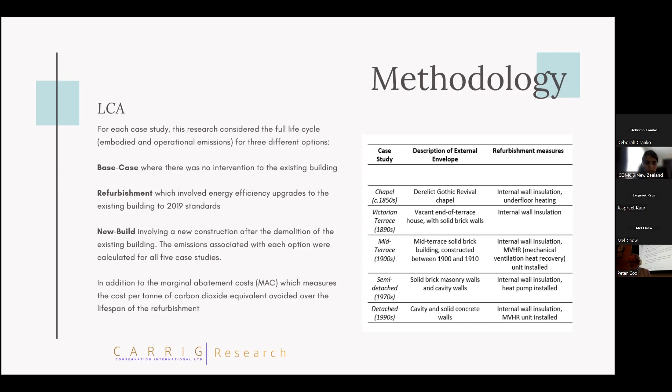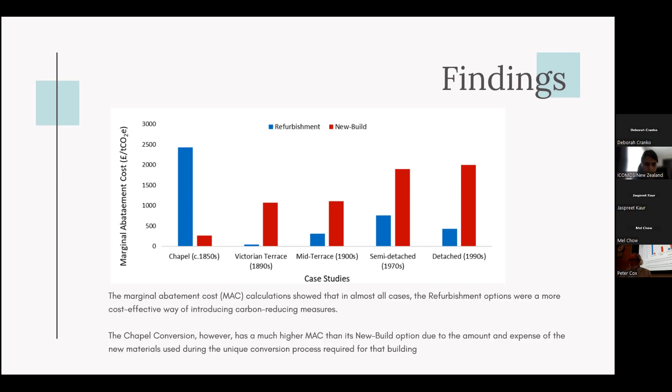What we measured was the reductions of that. We also looked at not only the carbon, but also the marginal abatement costs. This is a system used in the UK particularly, which looks at cost per ton of carbon dioxide. What we found is that doing the adaptive reuse and upgrade is far more carbon effective and cost effective than replacing any of the buildings we talked about.

And the worst case scenario - unfortunately this slide didn't work for me, but I had a little red circle. But if you can see my cursor, can you? Oh, can you see that cursor?

No. Well, basically the dark blue line is do nothing, and that means the carbon is increasing because of operational carbon and the leaky building. The dotted line is where you demolish it and build new, and you'll see there's a big increase in the initial carbon, and then it continues to go up. If you do the renovation refurb, then that's a gradual increase or decrease of carbon. It takes 63 years to pay back the carbon to replace a simple building with a new one. And that's really what we need to get across to people.

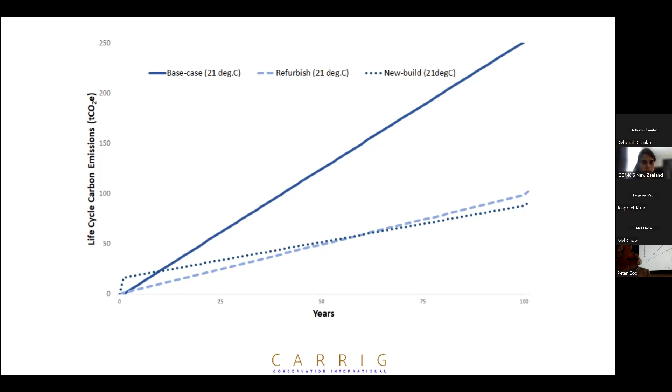Deep energy efficient refurbishment of historic buildings is necessary if we are going to achieve performances similar to new buildings. I also have a lot of argument for why building new buildings with carbon intensive products is not good for the environment. I know there's a housing shortage, but as I said earlier, we're beginning to see a lot of commercial buildings being vacant because there aren't that many people working in them anymore, working from home instead. So this could become a solution to both our housing shortage and reducing our carbon and particularly our emissions.

The quantity and type of materials matter, whether you put them into a building or take them out of a building. The simple use of an LCA tool can help, particularly at concept design stage, because that's the important bit.

And then there's EPDs, environmental product declarations. France is the first country in Europe to introduce legislation that all companies manufacturing anything have to have an independently certified EPD. That is going to become law throughout the rest of Europe probably next year.

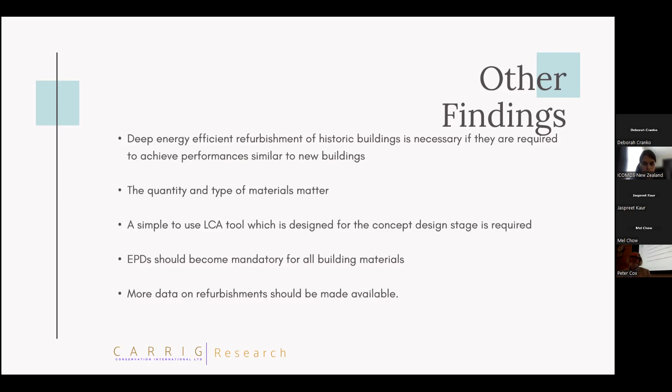So an LCA tool really should be easy to use, applicable to historic buildings, useful for concept design stage. And the planning process should allow for LCA so that the most sustainable decisions are made.

We did find a couple of years ago, because we came up with a good solution to a building and the owner went for planning, the planning officer didn't understand what we were doing and refused planning first of all. We had to go back to them and explain how and what we were doing, and what we were doing was right for the building. So we need more education to planning systems, but also better informed planners, if you like.

So we're hoping to come up with this kind of product, which will be a sustainable tool, suitable guidelines on sustainable historic refurbishment. That's already in train, and will be published in about August, certainly in Ireland, and it'll be available. All materials used in the building and construction sector in Ireland must have EPDs, and we expect that to be law by next June '24.

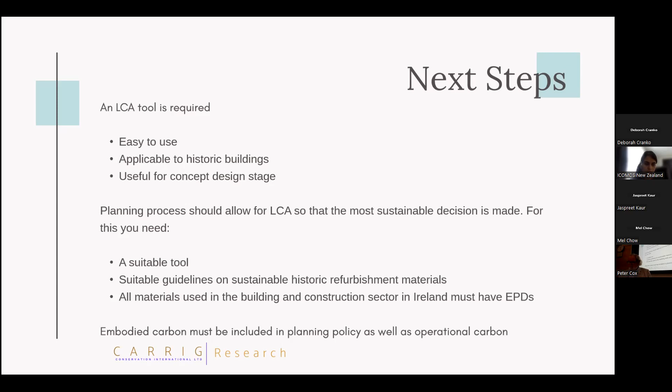So the circular economy is certainly a good move, and there is more buy-in, certainly in Europe, on this, designed for reuse and recognizing the value of waste. Tax incentives must be introduced to encourage material reuse, and local authorities could provide the skills to facilitate sustainable decisions.

This is the full document that we produced. It's on the Historic England website, and it's also on our website. They call it Heritage Counts, and they do a publication every year of different studies. This is a really good one.

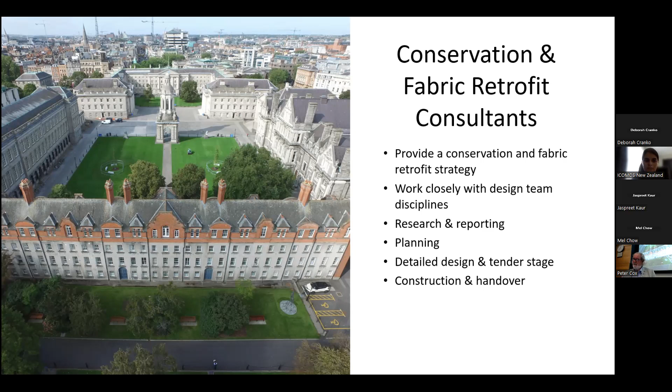So as I say, the back was originally harled, then cement pebble dash added in the 20th century. The cut-stone jambs and lintels were replaced for some reason, we don't know why. There were some new cast-in-situ window heads, which we left, as they were perfectly in good order. And then there was a lot of undulating stonework, because this was a stone main fabric.

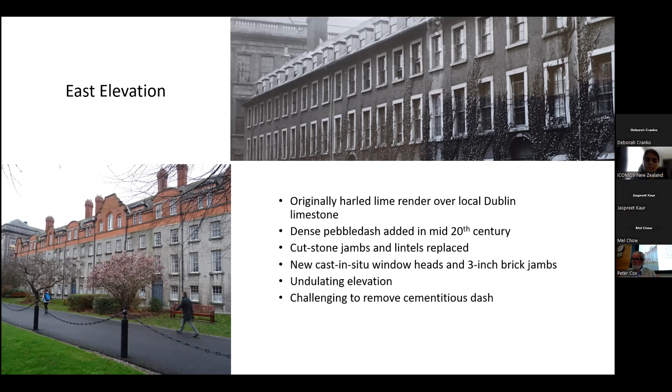So we removed the cementitious dash, and here you can see the rubble stone.

And then we started putting on the Diathonite, which is a lime-based render that has cork in it and is called an insulating render. In research we've done, mainly in Germany, we put this on a 1720s building and measured its performance over the last 5 years. A simple 40mm thick render with cork incorporated increases its insulation, decreasing the U-value of that wall by 35%, which is quite phenomenal. There are a number of products like that; we found the Italian one, Diathonite, to be the best performing.

But because it was originally harled, we did a lot of testing on doing a final lime dash on top of the render so you got the visual aesthetic of what it would have looked like. We did advanced weathering tests on that, and then evaluated what sand would have been used, the size, fines, etc.

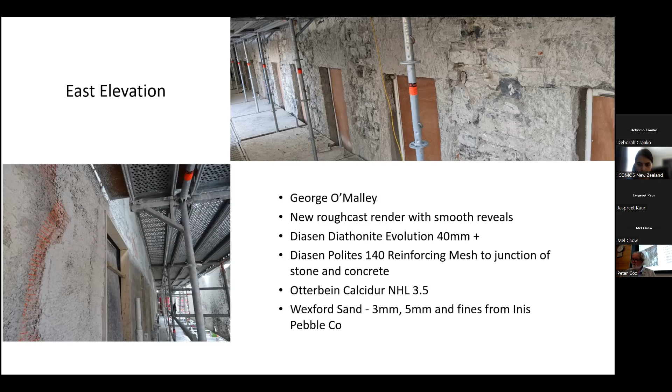Because we do all this materials analysis prior to writing specs, we can be very specific in writing them. We hired some of the best subcontractors, and again the college allowed us to do that, even though it was a public procurement project, which often means you have to take the lowest price, and that's usually bad.

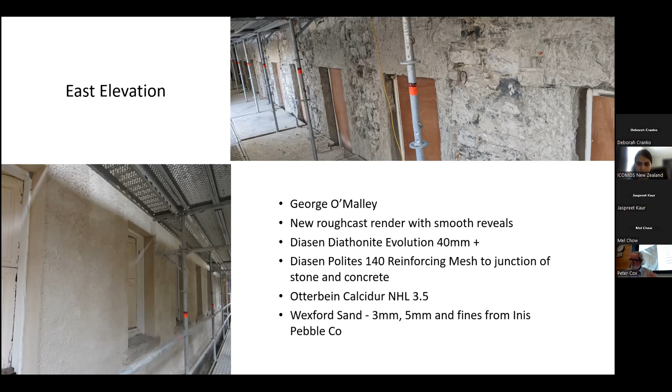So here it is on the bottom left at its final coat prior to the harling. It's worked tremendously, and we've been measuring the performance over the period of construction, and it's just phenomenal.

From an internal point of view, we like to do a lot of evaluating before we decide what we're doing, because if you're taking calculative evaluations on how things are going to perform, or how to do interventions, you don't have the actual information to make the decisions that you want.

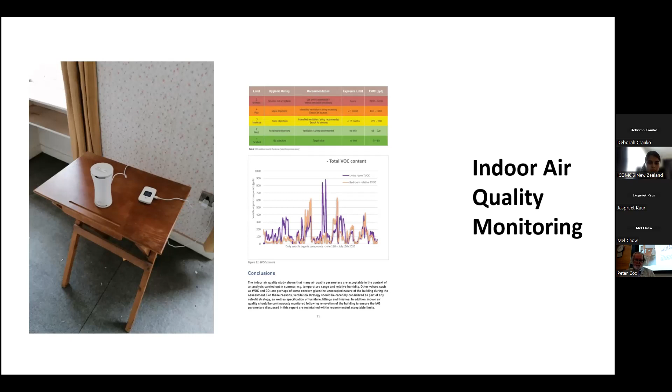So we carry out indoor air quality monitoring over maybe a couple of weeks, where we put these widgets in the existing rooms and measure the current indoor air quality. We've also been commissioned to do a post-occupancy series of tests as well.

We have invested in equipment to do in-situ U-value tests, where we put a widget on the outside and on the inside, and we can measure the heat flux and heat loss on the wall sections, but also on the window sections. And therefore, we know that we have accurate information.

We have a system in Ireland since the introduction of energy performance in buildings called BER, Building Energy Rating. If you want to rent a house, rent a flat, sell an industrial building, or sell an office block, you must have a BER cert. This is a tick-box system that was designed for post-1970 buildings. If you have a building that has a solid single-panel external envelope, it gives an automatic default of 2.2 U-value. I don't know what the conversion is towards, so apologies for that.

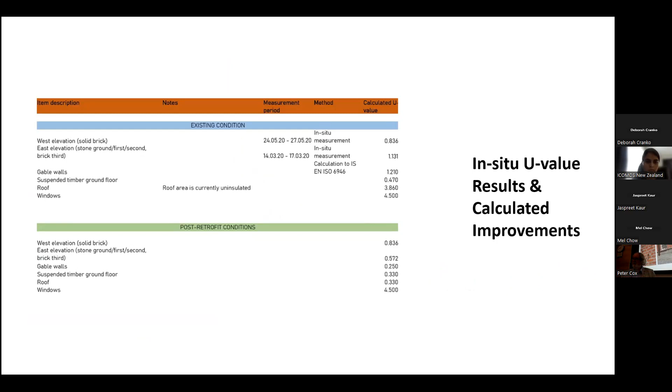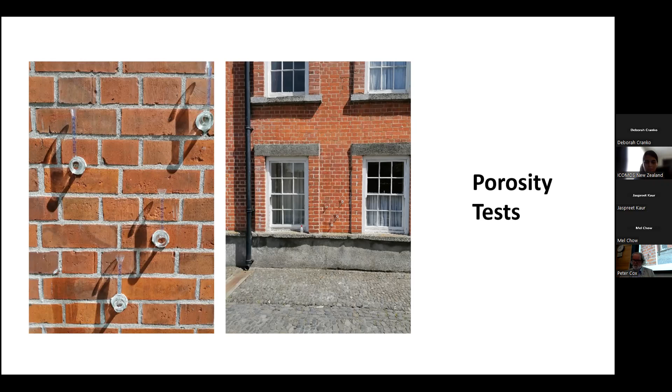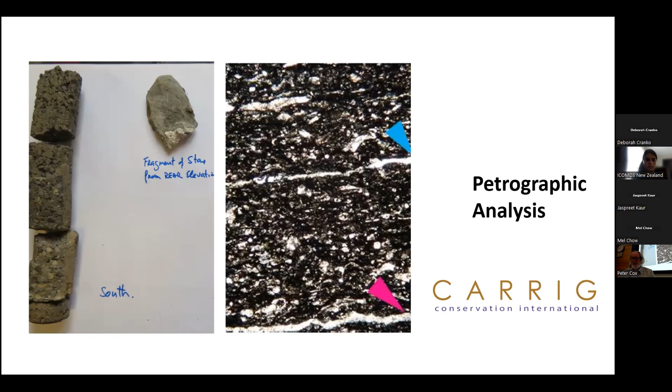Because we're affiliated with Trinity College, we have access to all the geology labs, and we took a core sample of the stone and did a full petrographic analysis that gave us not only the components, but also the porosity, the strength, and everything. So we do go into this in detail, but at the end of the day, it makes the building cost secure, because we knew what we were specifying, that it would perform, and therefore it was costed right.

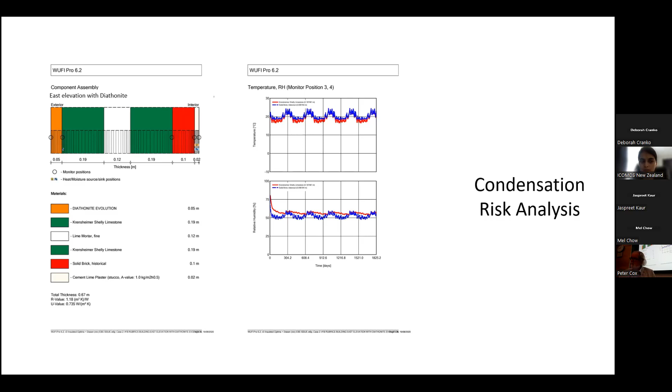In fact, this building did not run a penny over budget, which is pretty amazing. But it's all down to really analyzing the materials of the building first. We do condensation risk analysis, because that's one of the biggest problems in older buildings, particularly if you're using newer materials like closed insulation systems that will cause problems with moisture. We do a full thermal bridge analysis to see where the leaky points are, and we can then address those.

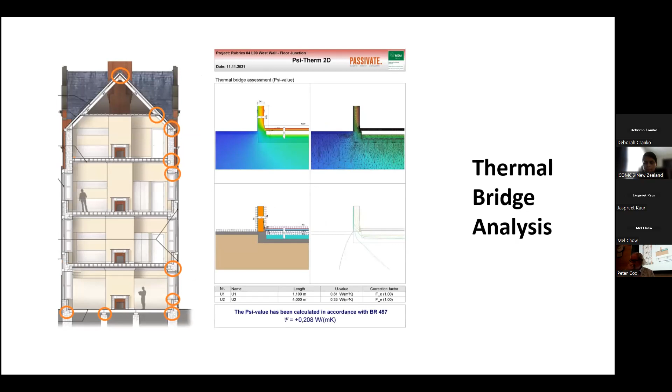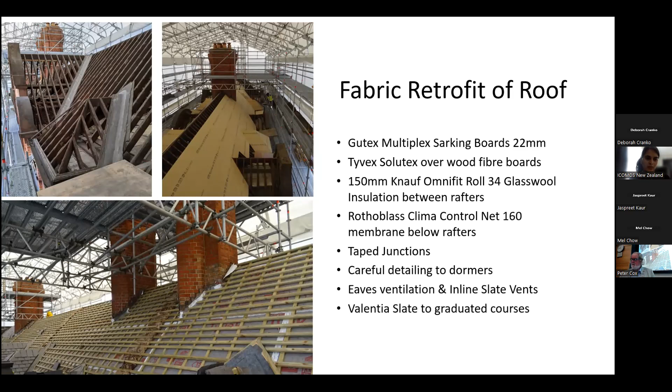So this is some of the work in Trim. The slate on the roof was original English slate, which wouldn't have been original to the 1690s building, but was actually replaced in 1895 or thereabouts. It was so bad you could stick your finger through the slate. So we replaced all the slate, but took that opportunity to really do a fantastic insulation job on the roof, which has performed tremendously well. We then reslated it with Irish slate, which reduced the carbon footprint of bringing material from England.

And this is some of the other photographs. The roof was extended in 1894, and that's why the steel is there. We decided to leave it, not to change it. So we used all that information to get there.

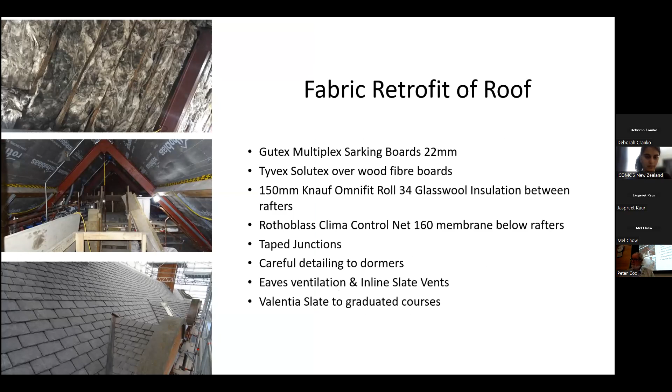There were suspended timber floors on the ground floor, with quite a void. We were able to put in geocell, a recycled glass insulation, on the ground and leave a gap which allowed air movement. This is performing really well.

At the moment, we're producing about 75% of the energy of that building through geothermal, with 21 boreholes that we put in the grounds. Then it's landscaped over again, so there's no visible destruction to the green area.

Already, even though it hasn't been released or publicly opened, enough people have discovered it, and they are trying to throw awards at it, which of course we'll accept. So I'll be going back to a flurry of activity on this building.

Just to finish off with a couple of adaptive reuse examples. This is a church, dating from about 1720. It was deconsecrated in the 1960s due to a fallen congregation, and the congregation moved to a neighboring church.

In 1986, some kids broke into it and set fire to it. As you can see, the roof and the chancel were gone. This is the poor architect, Derek Tynan, looking down and saying, 'Jesus, what have I done? How do I fix this?' Anyway, we did, and that's what it looks like today.

If you note, we found a full vault underneath the church with many burials in it, which we couldn't disturb, and also couldn't put three loads of floors on top of. So we designed steel trusses to sit on the original walls to hang the two upper floors, while the ground floor simply sits on the ground.

It's now an office for about, I think, 78 or 80 people. And again, we've managed to win, I think, 8 awards on that one for various things.

There was one empty vault that we were able to use for natural air ventilation and cooling. On the flat roof part, we have PV panels, and we kept the main chancel open with lights and windows on top.